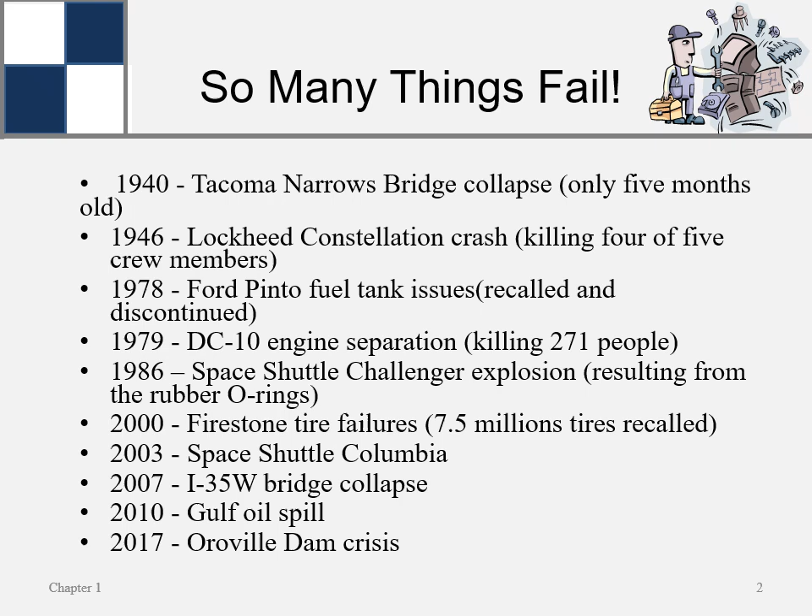What is the objective of reliability engineering? Reliability and maintainability engineering attempt to study, characterize, measure, and analyze the failure and the repair of systems in order to improve upon their operational use by increasing their design life, eliminating or reducing the likelihood of failures, reducing safety risks, and reducing downtime.

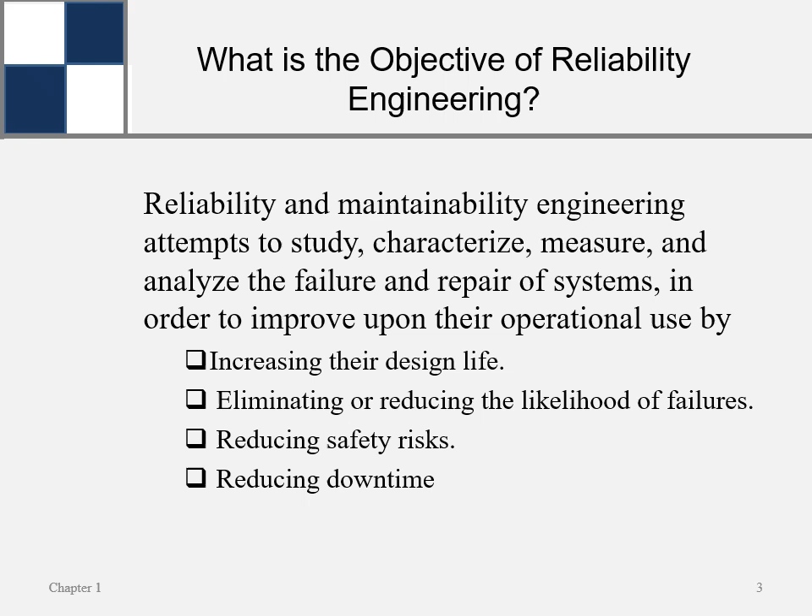Traditionally, engineers use deterministic methods with large safety factors, but this approach often results in over-design, thus increasing costs, or sometimes under-design when unexpected loads occur. In contrast, the approach taken in reliability engineering treats failures as random occurrences. It is a more realistic and practical approach because it acknowledges the inherent uncertainties and complexities of real-world systems.

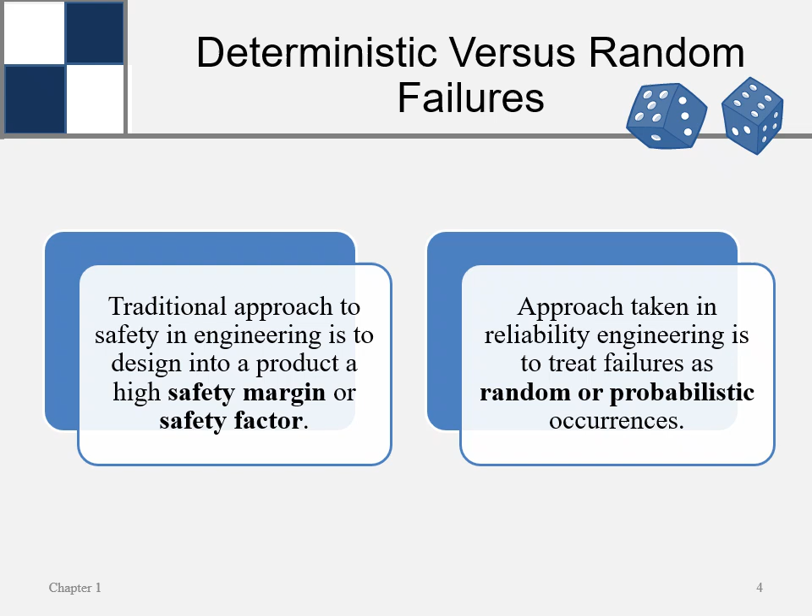In this slide, I'm going to give you 3 fundamental definitions that form the foundation of this field. The first one is reliability. Reliability is defined as the probability that a component or system performs a required function for a given time when used under stated operating conditions. We denote this as R(t).

The second one is maintainability. It's defined to be the probability that a failed component or system will be restored or repaired to a specified condition within a period of time when maintenance is performed according to prescribed procedures, and we denote this as M(t).

And the third term is availability, which is the probability that a component or a system is performing its required function at a given point in time when used under stated operating conditions.

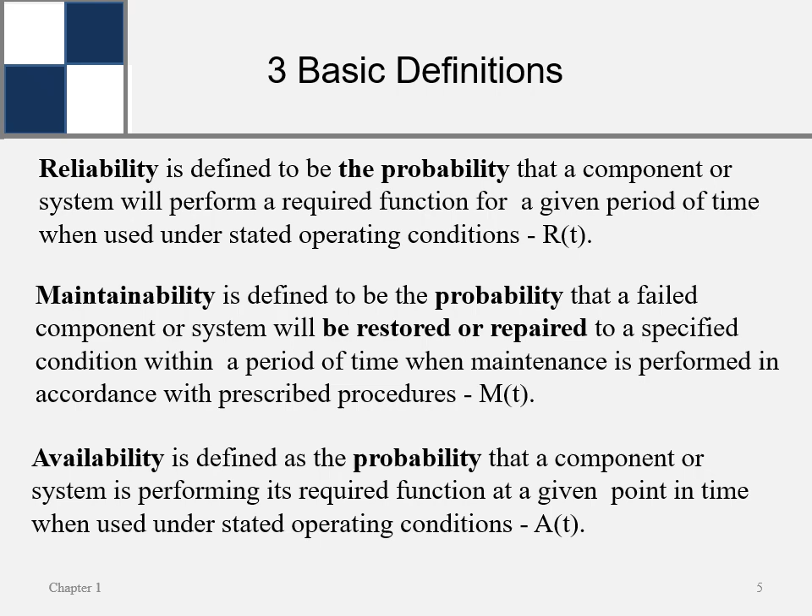You might wonder why reliability engineering has become so important and why we need to study this. There are several key driving forces. The first one is increased complexity and sophistication of systems. Modern systems are incredibly sophisticated. A simple smartphone contains more computing power than the computer that sent humans to the moon. As complexity increases, the number of potential failure modes grows exponentially.

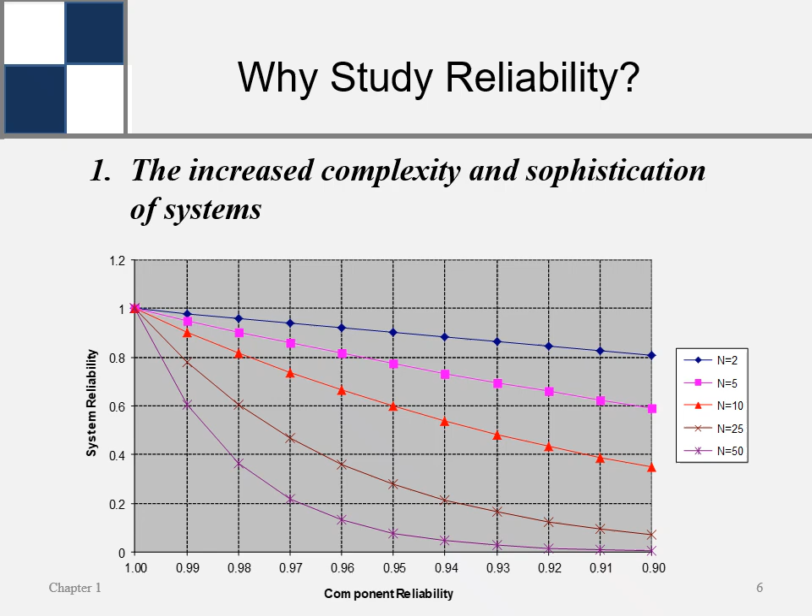Let me show you this example. If we have components each with 99% reliability and we need just 2 of them to work together, your system reliability drops to 98%. With 10 components, it's down to 90%. But with 50, you're looking at only 60% reliability. So in other words, complexity is the enemy of reliability.

The second driving force is public awareness and quality demands. Consumers are more informed and demanding. According to the Gallup survey, "lasts a long time" scored 9 out of 10 in importance to consumers, and in fourth place is "easily repaired." Those two factors are important to our customers.

The third driving force is government regulations. We now have extensive regulations such as the Food and Drug Act, the National Traffic and Motor Vehicle Safety Act, etc. Those laws and regulations represent our society's demand for safe and reliable products.

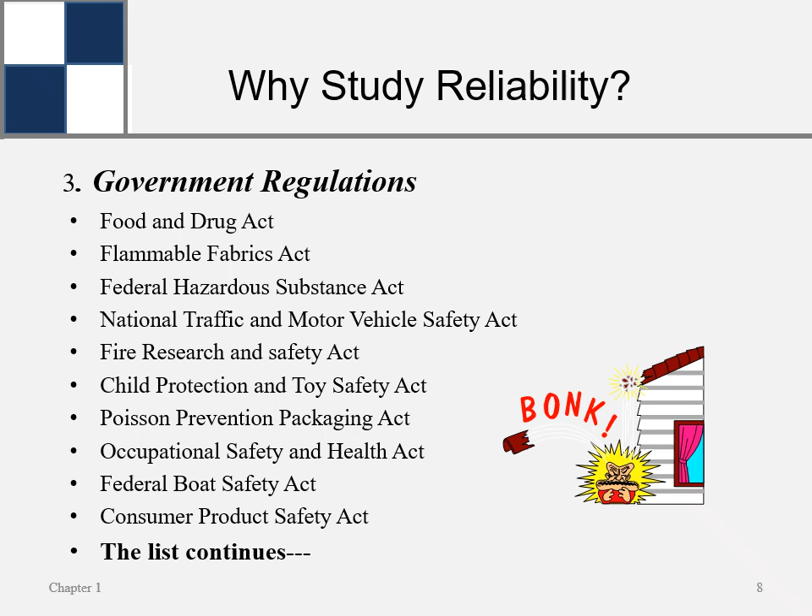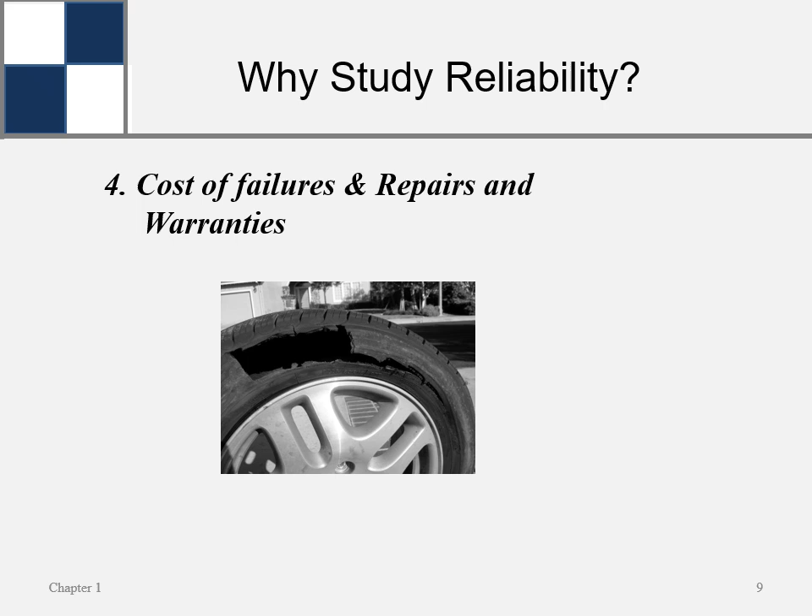The fourth driving force is economic considerations. The cost of failure, repairs, and warranty for many products can be enormous. It is much cheaper to build a reliable product from the very beginning than to deal with the failures later on.

Some students may wonder what's the difference between reliability and quality. It is important to understand the distinction between these two terms, as they are often confused. Quality is the amount by which a product satisfies the user's requirements. It's largely a function of design and conformance to the design specification during the manufacturing process. Quality can help us answer that this product meets specifications when it leaves the factory.

Reliability is concerned with how long the product continues to function once it becomes operational. It extends quality into the time domain.

Reliability can help us answer: will this product still meet specification after months or years of use? We can have a high quality product that is unreliable, or a low quality product that is very reliable.

So for a high quality product that's unreliable, I think about the sports car. And for the low quality product that's very reliable, I think about the hand tool sold in the Dollar Tree. They're not high quality, but because there are not a lot of moving parts, it's still a tool. Of course, the best products should have both high quality and high reliability.

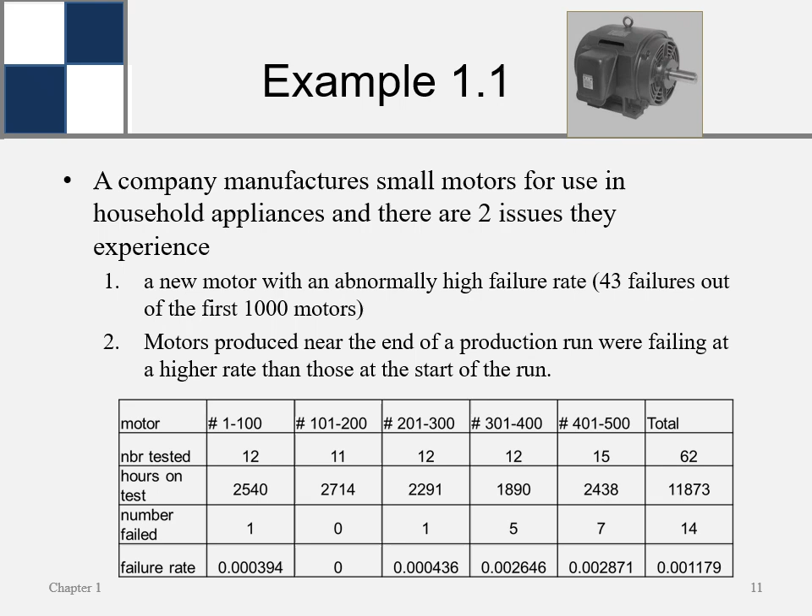And avoid using the mean time to failure or mean time between failures unless the failure rate is constant. A good example of a reliability specification is 95% reliability at 10,000 operating hours.

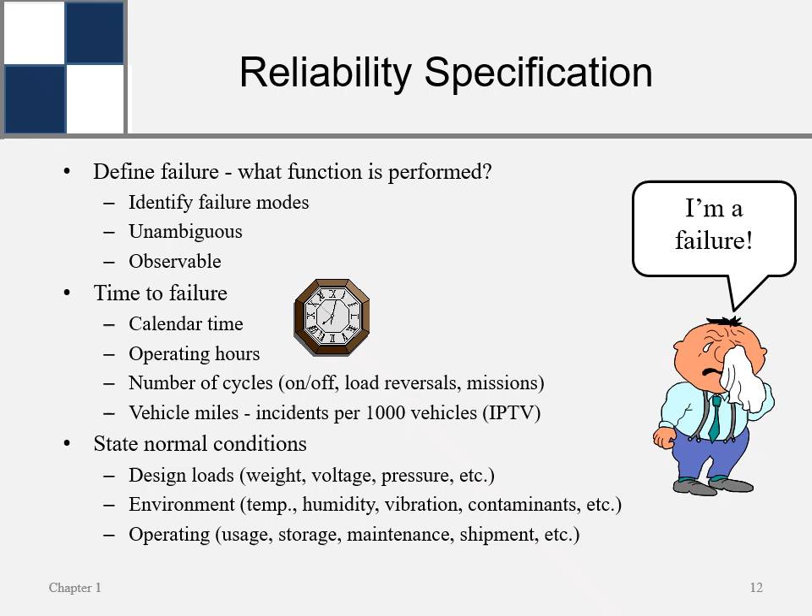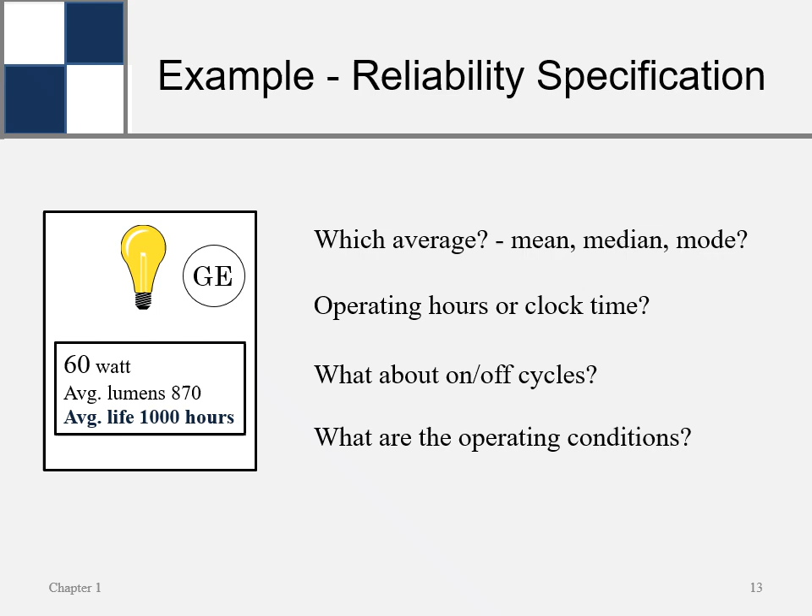There are several skills needed if you want to be a reliability engineer in the future. The first one is product and system design knowledge. You also need to understand the manufacturing and production processes. Life cycle cost analysis and management skills are also important. And you also need to know how to do risk assessment and mitigation for products and systems.

A typical path for a reliability engineer is to finish an undergraduate degree in an engineering field, have a couple of years of working experience, and then pursue further study in the field of quality with reliability as the focus. There are several certifications offered. One of those is offered by the American Society for Quality, and they are highly desirable. Besides the ASQ, we also have the Society of Reliability Engineers and the Institute of Electrical and Electronics Engineers Reliability Society. So that's the information if you want to pursue reliability as your profession.